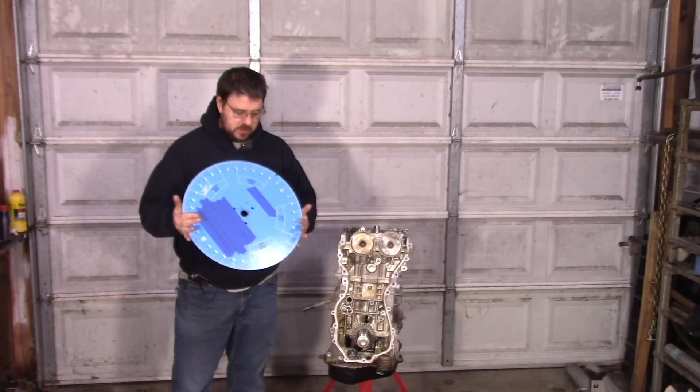a giant timing wheel. Why my timing wheel is this large, I don't know. I bought this thing like 20 years ago. I thought it was necessary to have one this big back then. It isn't, get a small one. But either way, that's the one that I have. So we're going to install that on the motor, time it to top dead center, and everything's going to be done on cylinder 1, of course.

And then we're going to see kind of where the cam lands. I've got some numbers for the 2AR that I just built, not only where my center lines are, but how much I moved by. And we can also unlock the cam to figure out exactly what our motion is.

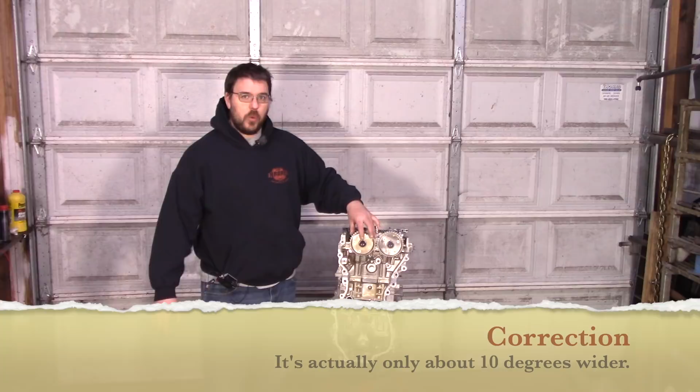And the goal is, these cams are just a tiny bit smaller than what I put on that motor, but these are VVTi wide solenoids, so they actually go about 10 degrees wider. So we should be able to cover what the 2AR does from its earliest valve open to its latest valve closed, because this solenoid is even wider. Plus, I wasn't even using the full range. The normal intake gear will move 50 degrees, and I was only using 40 degrees of it. And the normal exhaust gear will move 40 degrees, and I was only using 25 of it.

Plus, on the exhaust side, there's going to be some trickiness on top of the fact that the timing mark is nowhere near where it needs to be, because I made a decision not to put an exhaust VVTi solenoid on here. I'm going to leave this intake solenoid because it's just easier. And the only problem is it's going to make it hard to start. So we're going to have a bunch of extra motion in this gear.

So once we figure out what our range is, we'll have to make a decision for where to put this to make it easiest to start. Essentially, to make it easiest to start, we want this to open as early as possible. Of course, that's complicated by the fact that the rest position for an intake cam is as late in its range as possible. So we're going to have to narrow down the available range to compromise between being able to start and being able to get max power. Well, no - to be able to start and to be able to idle, because max power is actually somewhere between the two of those.

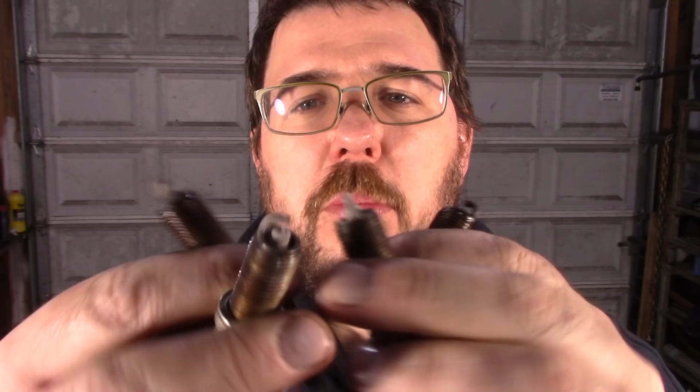So the plugs actually look like they might be gapped a little bit small, but they're actually in pretty good shape. I'm going to check the heat range on these, make sure that it matches what the 2AR-FE needs, check the gap, and I'll probably just run these. There's nothing wrong with these.

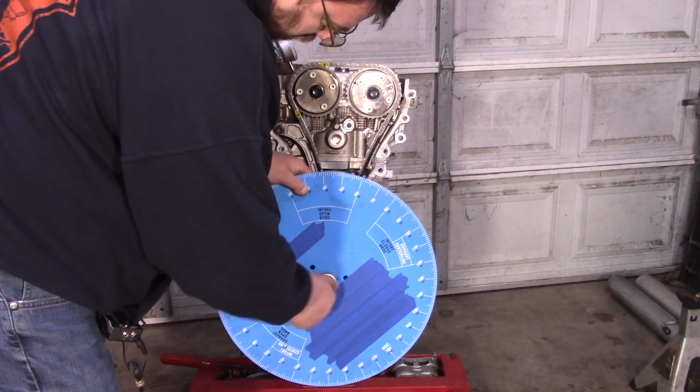So here's what we got. We got a dial indicator on the valve that's actually moving, and we've got the cam here in position. The dots are lined up, so it's locked. The yellow line was 2 degrees advanced, so 2 clockwise from where it should have been, and the red mark down here was at the right place.

Now this needle here isn't actually at top dead center yet. That's the first thing we've got to do, find the top dead center. So I put an extension in there, and it's at a level that I can measure right now, and I'm going to go until it gets back to that level. I'll see how much this has traveled, and halfway through there will be top dead center.

I wasn't expecting that easy of math. So that means we'll go back to 90 - that was our top dead center. And then we'll reset our wheel to 0, and then it'll be indicated properly.

All right, so obviously that's tough to tighten without getting this thing to move. But now that we're close, what we're going to do - I'll set it at 90, make sure my height's right, set it at 90, make sure my height's exactly the same. If that's the case, then we'll be at 0. Otherwise, we can just adjust this one way or the other a little bit.

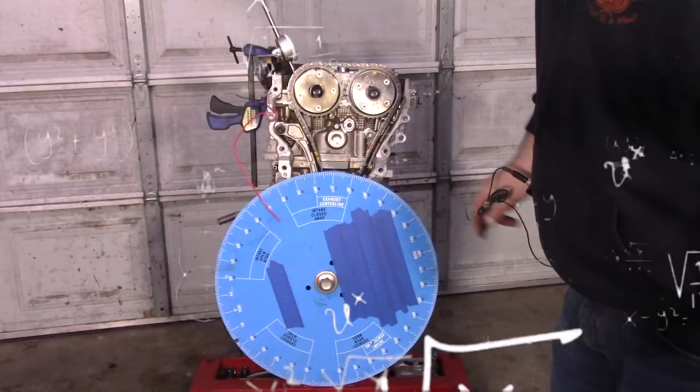Other than setting the pointer at the right location, this all goes off the rails. I end up needing to sleep on it, and we'll pick back up the next morning.

All right, so today is the next day, and this is wrong. What happened is I had this all written as just a whole bunch of numbers, and the problem is some of these numbers are in crank angle, some of them are in cam angle, and it's just a bunch of numbers. It's easy to get confused about what's after top dead center or before top dead center. So I'll pop it up on your screen here - what I have is an actual graph of what we're doing.

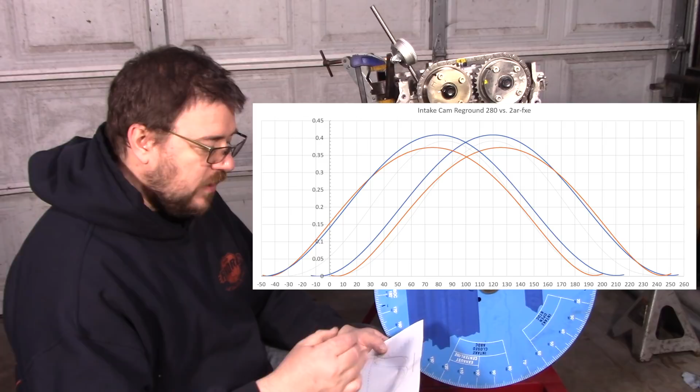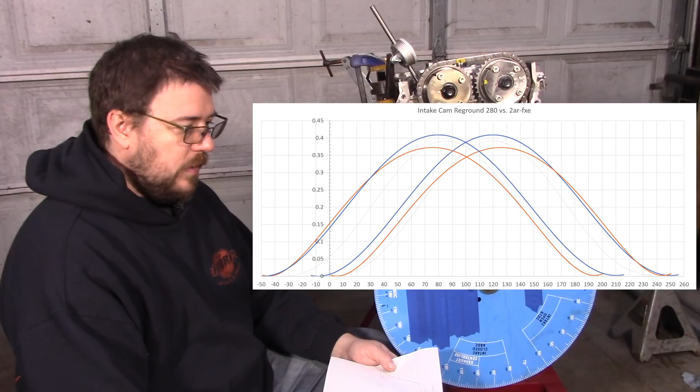So you can see the taller profile here is what we had in the 2AR-FXE that was reground. We were using 40 degrees of VVTI there, and thankfully, since we're using the wide VVTI, we've got 50 degrees. So what I'm aiming for is to place the angles so we can cover the entire span we had before, even though the previous cams were actually just a little bit wider.

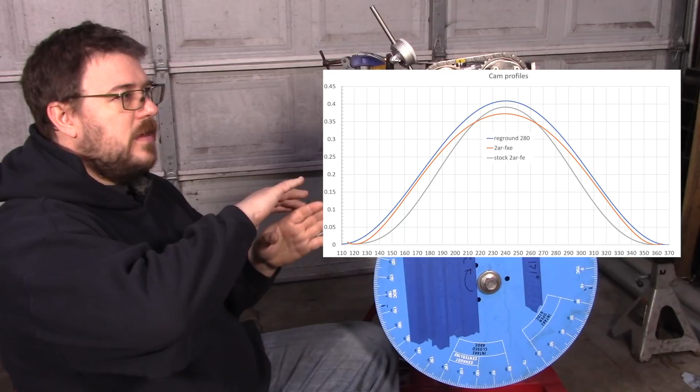And the other nice thing is, you see how that hill on the top crests over - that's a smoother transition than especially that stock one where it's kind of a sharp point, and it's smoother still than even the reground cam. What that means is we'll be able to spin this thing at a higher RPM.

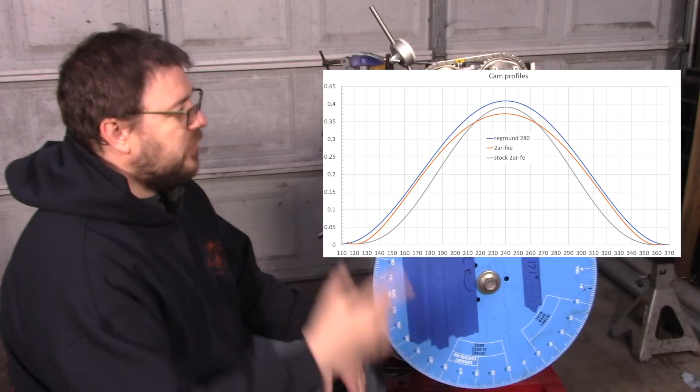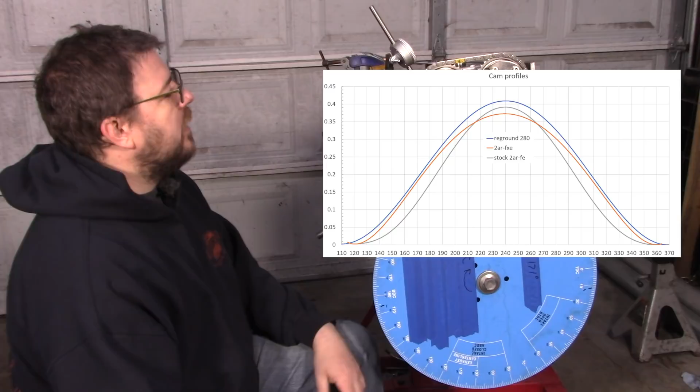So with those stock cams, these valve springs had control for 7,200 RPM. I bet you with the stock valve springs, with these cams on both sides, we'll be able to run 7,500, 7,600 without any concern of valve float. So a little side benefit. Hopefully this thing actually makes power up there. We'll find out when we get to the dyno.

But first things first, let's take this diagram here that I made, and I'm going to take these angles. I'm going to erase all of this and put the right angles on it. So the pointer's at the right place, but everything else is wrong. Let's do that right now.

All right, now this gives us a better idea to work from. Now these marks here, this is my advanced mark. This is the retarded mark, which should be when this is locked. And don't worry, I'm screaming at myself too here. Yep, as careful as I was, I wrote lock on the wrong position. Lock is the further counterclockwise position, not the clockwise position. So what's about to happen here is I'm going to set the timing perfect, but to the wrong marks.

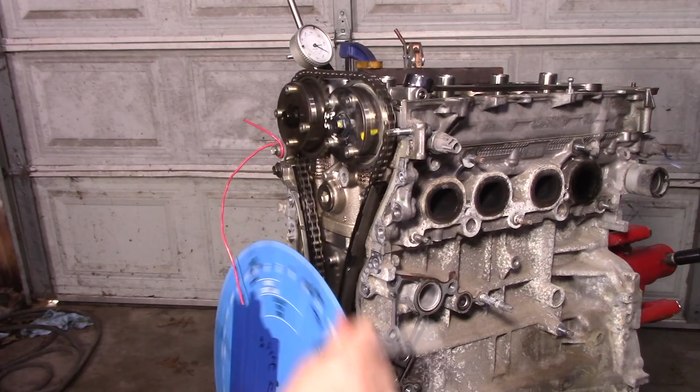So let's fast forward a bit. So the motor spins this way, right? Which means if we advance, we go this way. So why is my advance mark behind? Because if we're on the intake stroke, we're going to open the valve about here, come to the center line, and close our valve about here.

We're going to draw just the locked position on here. So that's this curve right here. So we want at 125 degrees, I want this to be the center when it's locked. Then, since I had set it when it was advanced, that's why it was all wrong.

So on this, since with this we got to go about 100 ahead, so 1, 2, 3, 4, 5, 6, 7, 8, 9, 10. So this right here should be where we're locked when we're starting to lift the valve. So let's set it based on that. Okay, let's find the, oh, okay, that was right. Okay.

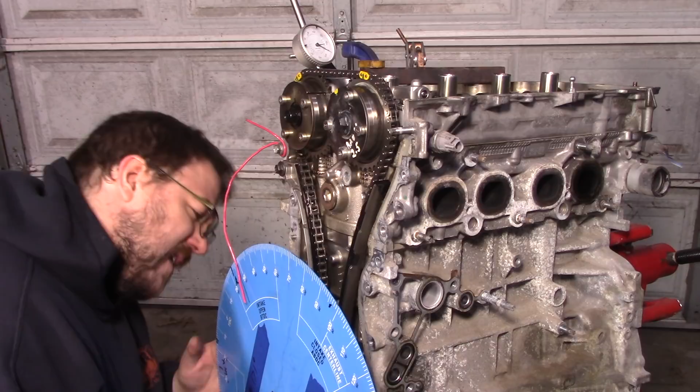So that means if we, no, sorry, the mark is ahead by 1 tooth. So we would have to rotate the chain 1 tooth this way, which would place this right here. All right, and to show you guys what that is.

All right, so our intake 2AR-FXE cam, to give it the right position, we need to go 1 tooth. Originally, I had said it needed to go 2 teeth, so to this one instead of this one, but the problem here is there's 360 teeth here, so I assumed that they were 10 degrees apiece, but

did I say 360? They're 36 teeth, so I assumed 10 degrees apiece, but that one down there, which is what counts the crank angle, has 18. So each one of these teeth is 20 degrees. So we have advanced, by going this way, by 20 degrees, the intake cam relative to the 2AR-FXE.

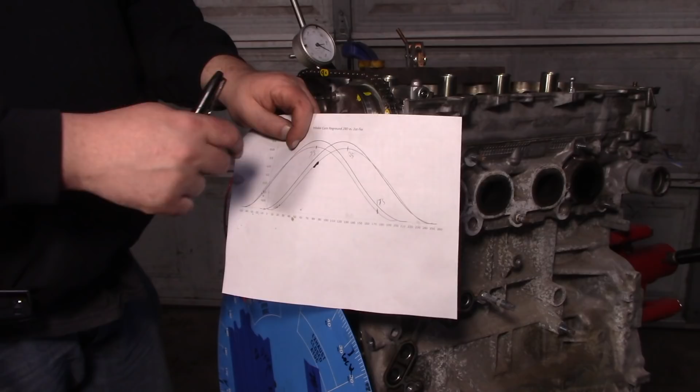Next, instead of fumbling in the dark again, I'm going to go ahead and just make this diagram for the exhaust. It'll be on screen in a second when I come back. All right, now I've got the exhaust one prepared. You can see it right here. There's a couple differences with this one here. First, you'll see the FXE cams that we're putting in are much further apart.

So what I put on the drawing for the reground cams is I didn't put the range that they can do. Instead, I put the range that I used. So the reground cam furthest on the left is where the locked position is. And then we move about 25 degrees. And interestingly, I didn't notice this until now, but the stock cam advances actually about 35 degrees or so, and it places the closure line exactly at the same spot of where the stock closes.

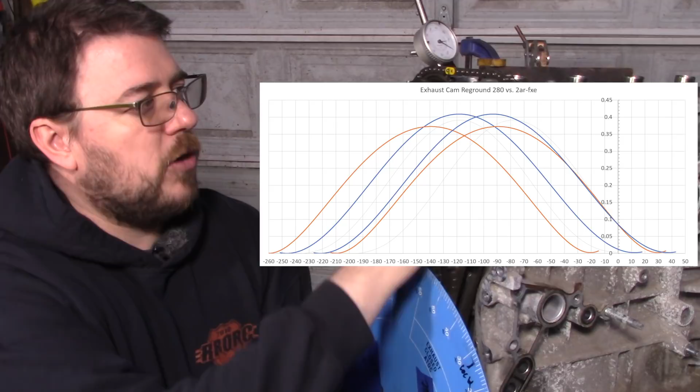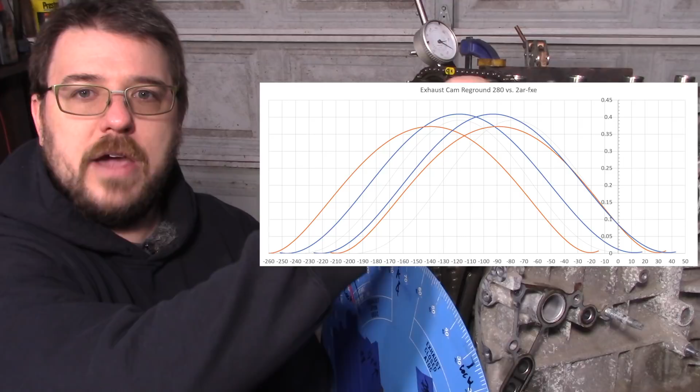So the drawing that I made for the one on the left is just the 50 degrees that this allows. I don't think I'll ever need to go that far. It just doesn't make sense to have your exhaust valve closing that early, but it shows the range. Now, the advantage that buys us, since we don't need to use the whole range to the left of that graph, is if we can't match it exactly, because this only gives us 20 degree accuracy, we'll just take the whole thing, we'll shift it a little bit to the right and see

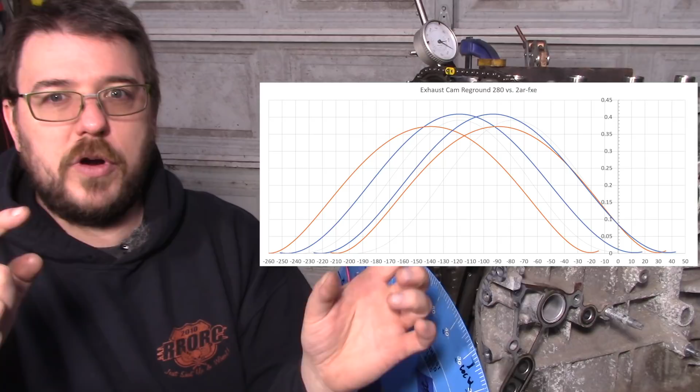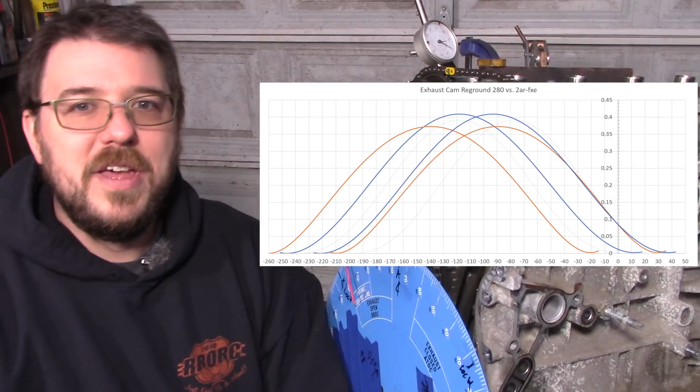if that helps. We basically want that window for the FXE to be able to cover the entire window of the reground cams. And if possible, if there's extra, we want to push it as far to the left as possible. I realize I just pointed on the right, far to the left as possible. And that's what's going to allow us to start easier. But again, we're not going to have that much adjustability in here. We got pretty lucky on the intake side. Let's hope for some luck.

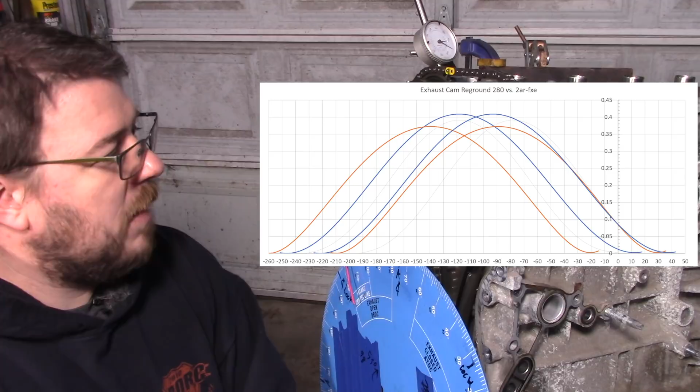So I got to move all this. I got to move the rocker now so that it's actuating the exhaust valve so I can measure that. And I got to move this measuring equipment to the other side. So it'll take a second here, but I'll be right back.

Okay, never mind. That's all wrong. That's all wrong. In fact, it might be so wrong that it might actually be somewhat correct. Motor spins this way, and I was trying to make it so that this was about to close, right? So we're at top dead center-ish. So this is supposed to be about to close, but it's actually about to open.

Oh, hold on a second. Oh. Oh, okay, okay. I can't actually time it there because that would put this cam 360 degrees off. So in this position here, with these up, we are at TDC, and we're supposed to be about to open our intake valve.

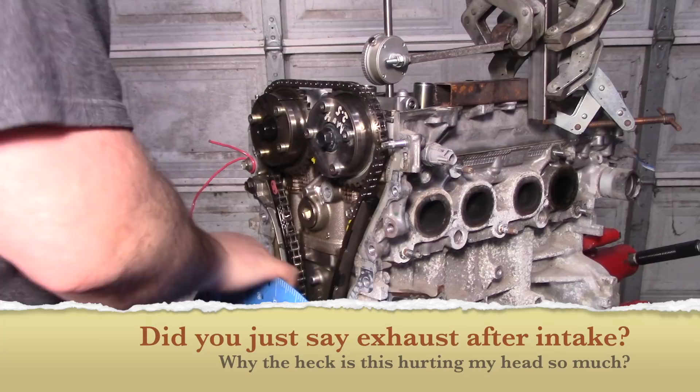Sorry. Let me go through the rotation here. So right now, this is our compression stroke. This should be our exhaust stroke. This is our intake. Okay, which that's where the cam's at. And then this should be our exhaust. But our exhaust valve is opening now. Well, somewhere around 200 degrees too late. Okay.

So we just need to rotate this about 180 degrees. All right, let's do that. We're actually going to go around the other way so we don't have to skip the lobe there, but same difference.

Aha, okay, there it is. So is that tooth aligned? Okay, so that tooth's aligned down there. That's on the mark here. And that's on the mark there. So let's see, relative to the timing mark. It's gonna be 1, 2, 3, 4, 5, 6, 7, 8, 9, 10.

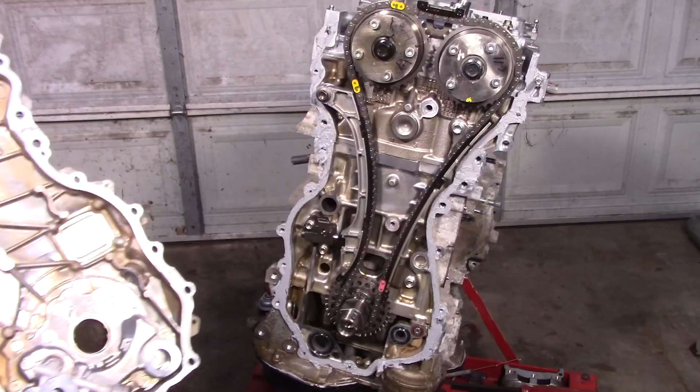And yeah, here, just cleaning timing cover and RTV on there. And then torque the cover back on. The little fasteners here get 20 and the bigger ones get 35. Crank pulley. And then don't forget those O-rings on top. And then the valve cover. Again, 20 foot-pounds up here. And then I'm going to re-gap those spark plugs. I'm opening them up to 40 thousandths of an inch, or about 1 millimeter. And then finally, we just want to clean those mounting surfaces so that this thing doesn't have an exhaust leak. I also end up getting the intake side, but that's not on video.

All right, so I finished this off camera. The battery ran out. Sorry about that. But at this point, we have polished this hybrid. We've turned it into a regular motor, no longer Atkinson, with a long duration intake and exhaust cam and 12.5 to 1 compression ratio. So this thing should run on premium pretty well. And I guess we'll find out in a couple days here, hopefully. Well, okay, it might be a week, but what's the number we're going to get out of here?

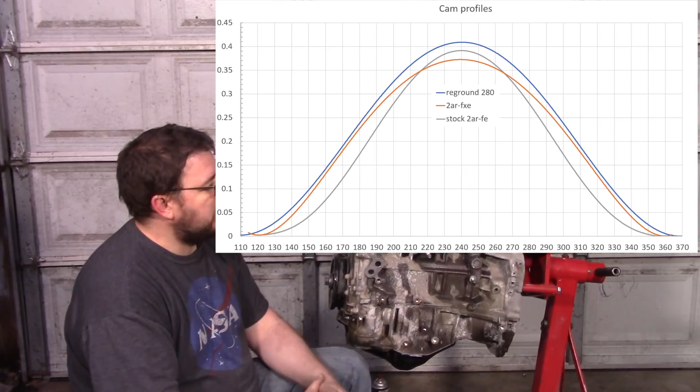I feel pretty confident that 280, 290 is, because let's see, if I pull up that graph again here, you see the fact that the intake is 260 degrees instead of the regrind that was 280 doesn't really do it justice, because you can see the hybrid, the FXE cams, they ramp up faster. So where you're at a point in the curve where it matters, it's almost the same width. Now, there's not as much lift at the top, and that will affect things, but lift is not as important here as duration. And of course, we're going to gain 8 to 10% more horsepower just from the compression bump.

So the 8% we're going to lose to a displacement change is going to be made up by the compression ratio. And yeah, either way, I think we're going to get 10 to 20 horsepower more than what we had, probably closer to 10. So, which should give us, right at this end here, 280 to 290. So I'm pretty excited about that.

And yeah, so I guess that means tomorrow I got to bring the race car back in the shop and I got to change the motor in it yet again. It's been happening a lot lately. Thankfully, it's not because the motor's blown up, though. Yeah, either way, it'll be out and in a day. I can't wait to drive this thing, so super excited.